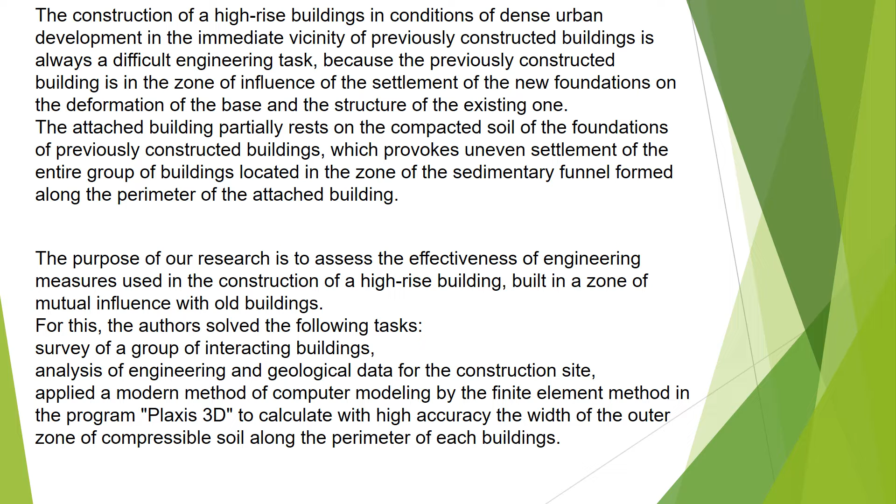We propose to consider an interesting positive example of taking into account all factors of mutual influence. A group of 3 houses in the Russian Federation in the city of Tambov on Sovetskaya Street 156-158. The results of the technical survey of the group of 3 buildings built in the zone of mutual influence in the central part of Tambov are given.

On the basis of the available engineering and geological data and the calculations of the stress-strain state of the base using the Plaxis 3D program complex, the causes of wall deformations were established. An analysis of the implemented measures to reduce mutual influence during the design of the attached high-rise building of the 3rd stage was made.

These buildings are located in the zone of mutual influence because their walls are tightly adjacent to each other. The first building was built in 1958 at Sovetskaya Street 156. The second building was added after 5 years outside the zone of mutual influence because it is located 12 meters from the first. According to residents, it began to deform immediately after construction, and characteristic subsidence cracks began to appear on the facades, especially the southern section of the house bounded by the second expansion joint.

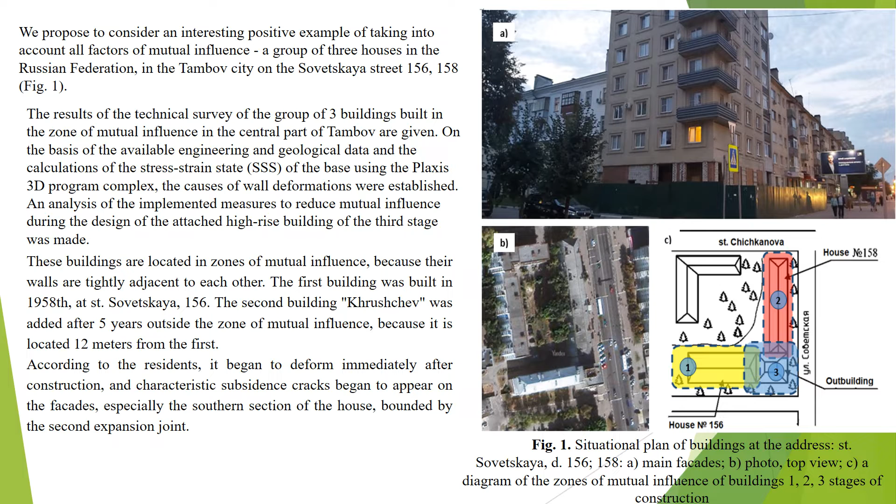In 1994, between 2 previously constructed buildings, construction began on the 3rd one, designed by Tambovgrazhdanproekt, with a height of 7 floors. It was a challenging engineering task because the new house fell into the zone of mutual influence of both buildings, which moreover had already damaged load-bearing walls. To solve this problem, the following decisions were made.

It was decided to strengthen the building of the first stage of construction from the side of the attached house with tie belts to separate the levels of bearing mutually influencing soils of the foundation. The foundation of the new building is deeply laid, piles 10 meters deep, with a pile diameter of 800 mm, with broadening in the lower part up to 1200 mm in order to exclude dynamic impacts. Drilled piles with broadening are accepted.

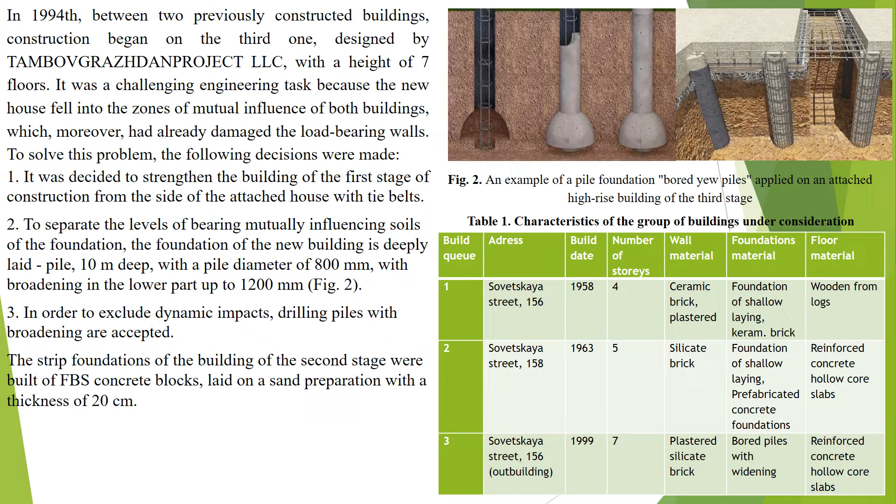The strip foundations of the building of the second stage were built of concrete blocks laid on a sand preparation with a thickness of 20 centimeters. Let's consider the influence of an extension of a new higher 7-story building on the existing 5-story one.

In 2004 and 2018, the building of the first stage was redecorated from the facades at the time of the survey in 2005, according to the residents as well as a result of a visual inspection. The condition of the building was established. House number 158: new crack opening is not observed. The facades have only old, non-progressive cracks. The 7-story extension between house number 158 and 156 is currently cracked and evicted. Work is underway to strengthen the load-bearing structures.

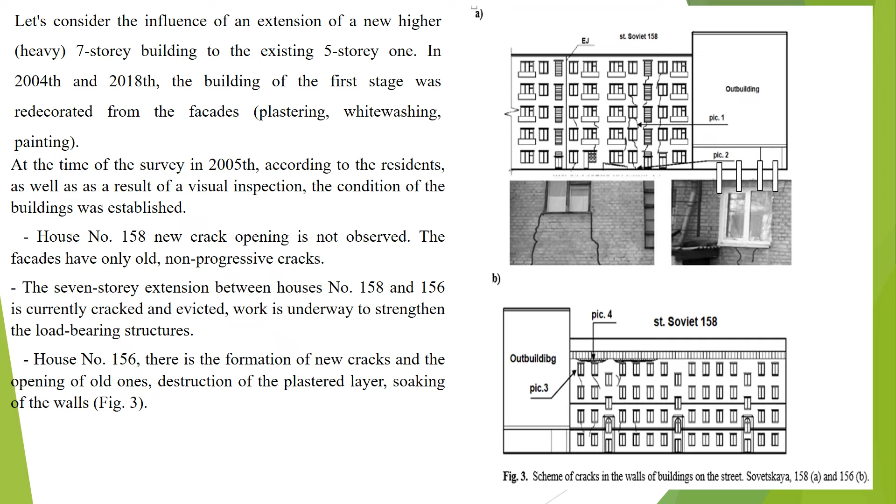House number 156: there is the formation of new cracks and the opening of old ones, destruction of the plaster layer, soaking of the walls. Engineering and geological situation in the construction area. All buildings of the group under consideration have damage in the form of cracks on their facades. However, this damage is not related to mutual influence. So buildings of construction stages 1 and 2 have deformations associated with uneven subsidence.

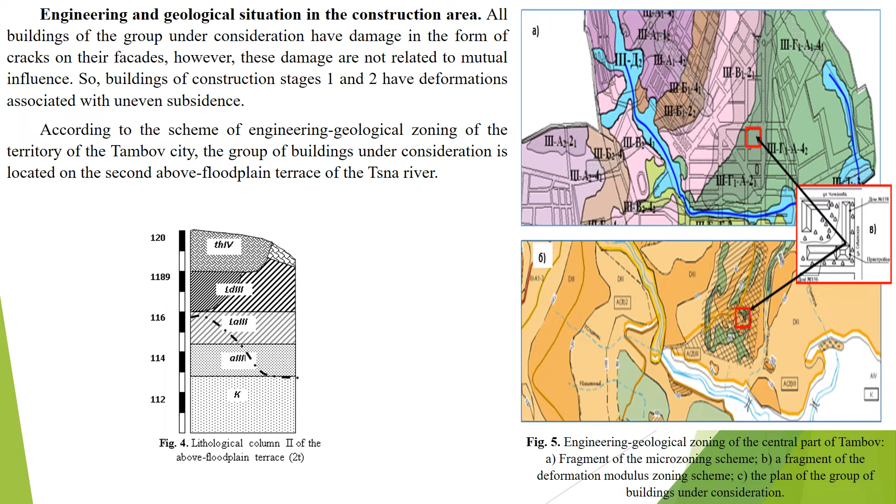According to the scheme of engineering geological zoning of the territory of Tambov city, the group of buildings under consideration is located on the second above-floodplain terrace of the Tsna River. Methods: 3D modeling of the stress state of the foundation-building system was carried out in the calculation program Plaxis 3D. As a result of calculation, pictures of the distribution of displacement and stress fields in base soil were obtained.

The widest zone of soil subjected to vertical displacements, 16-36 mm, is located along the perimeter of the building of the first stage of construction. Modeling in Plaxis 3D showed that its width is about 0.8 meters along the perimeter of the building of the first stage, 1.2 meters along the perimeter of the building of the second stage, and 0.5 meters of the third stage of construction.

Figure 6b illustrates the transfer of total vertical stresses from the pile foundation of the building of the third stage of construction to the lower, more durable number 2 and 3 sandy soil. This reduces the vertical displacement under it. Accordingly, the influence from a heavier building on neighboring less heavy ones has been reduced.

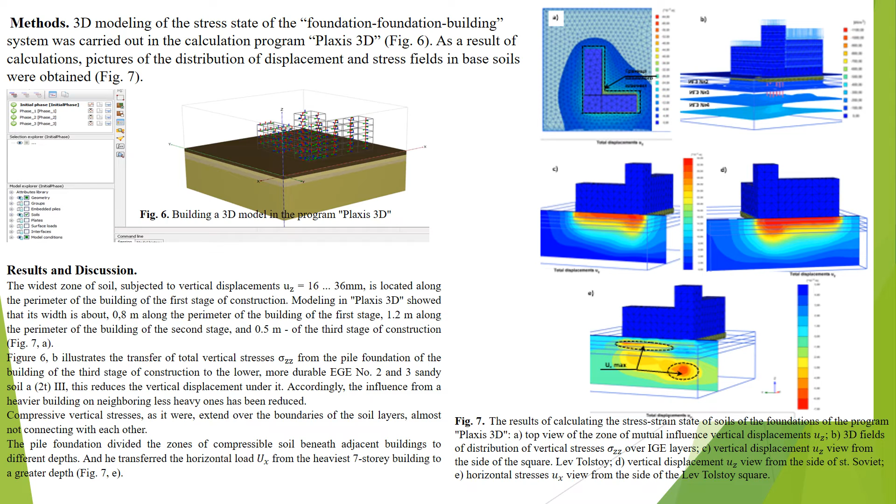The scheme of engineering geological zoning shows the effectiveness of the considered engineering solution in conditions of high variability of the deformation characteristics of base soils. Surveys showed the damage of buildings of the first and second stage was caused by uneven subsidence of the foundations, and of the buildings of the third stage by a design error associated with the choice of an insufficient section of the columns. No deformations of the bearing walls caused by mutual influence were found.

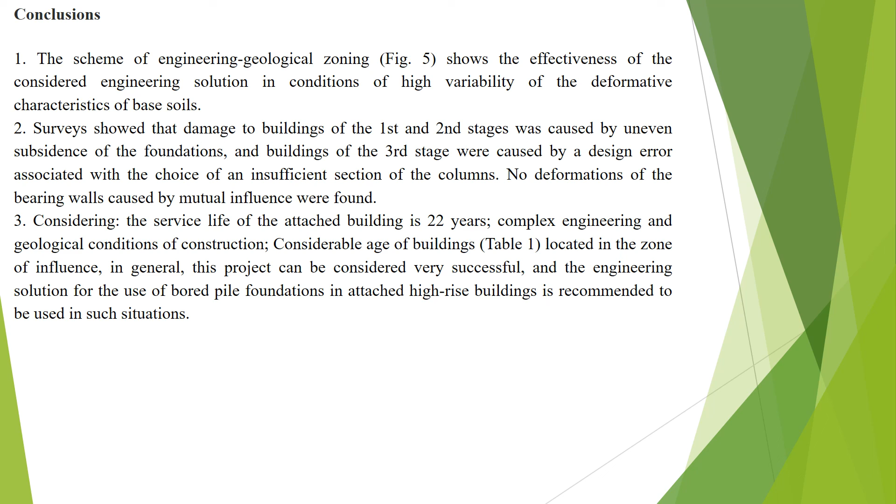Considering the service life of the attached building is 22 years, the complex engineering and geological conditions of construction, and the considerable age of buildings located in the zone of influence, in general, this project can be considered very successful, and the engineering solution for the use of bored pile foundations in attached high-rise buildings is recommended to be used in such situations. Thanks for your attention.